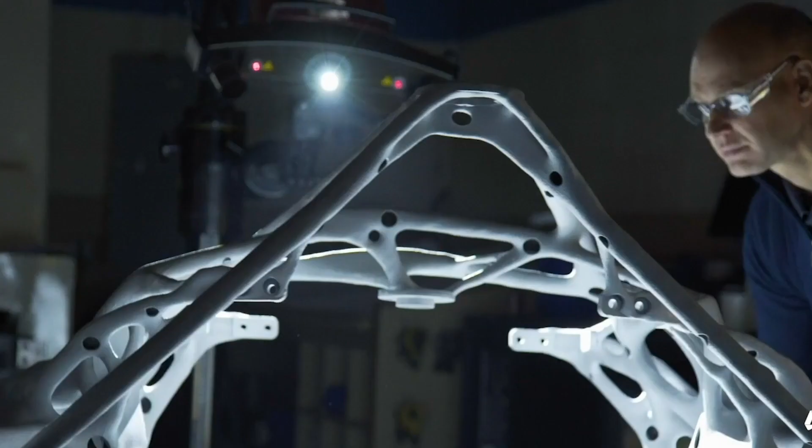I'm here at the Autodesk Technology Center in San Francisco, right at the pier, with our 3D printing lab right behind us. My name is Leanne Gluck, and I lead the business and industry strategy for additive manufacturing here at Autodesk, with a particular focus on our Fusion 360 platform.

2020 has been a landmark year, and we have seen the impact of the COVID crisis on the manufacturing industry, from interruptions to supply chains, to figuring out how workers can do their jobs remotely, to the needs for product innovation, especially in the medical industry.

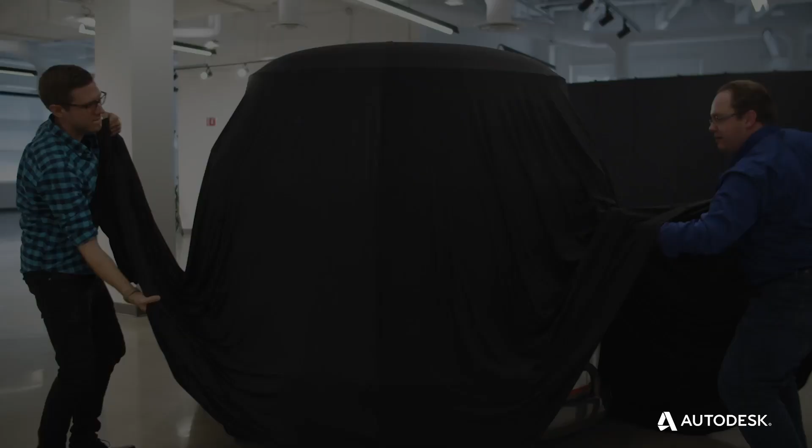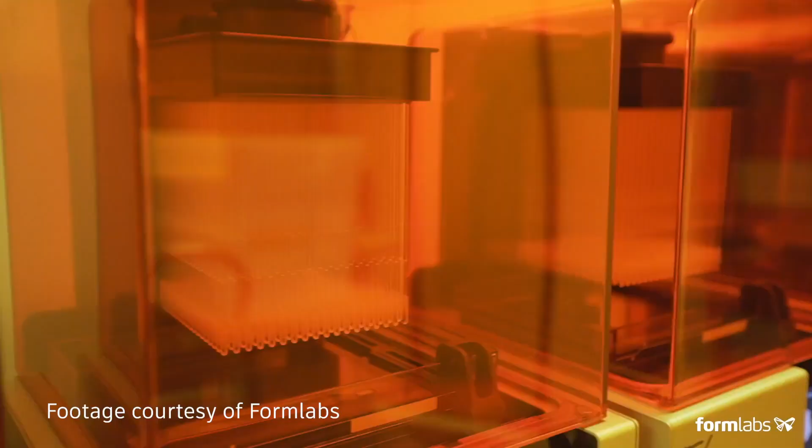And as we have seen, the additive industry has in so many ways risen to the challenge these current times have presented. From mobilizing to manufacture PPE, to redesigning and producing ventilators, to companies like Formlabs manufacturing 3D printed swabs, the COVID crisis has shown that 3D printing plays a key role in responding quickly to whatever comes.

We mobilized very quickly around PPE, but what really struck me when this all started was that this won't be the last emergency, and this won't be the last thing that we need to make quickly. We will have new issues that will compound. The next disruption may be a natural phenomenon, like another hurricane, a geopolitical issue, or another health crisis.

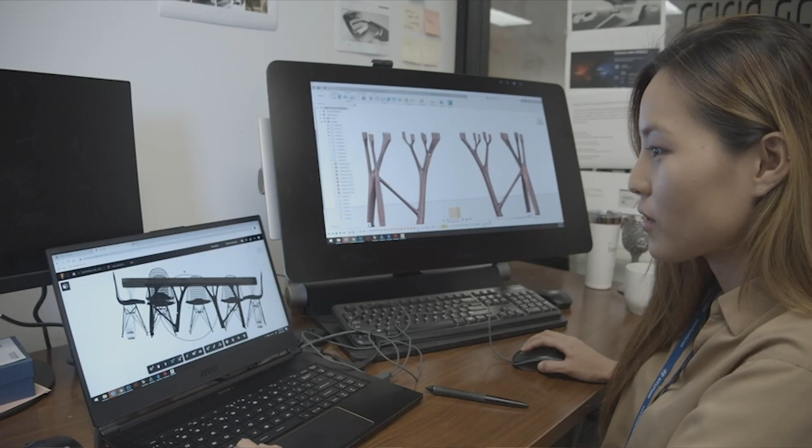And we've seen the need for growing collaborative platforms and cloud-based software that Autodesk provides to help us meet these challenges. Today, we are seeing the vision of additive manufacturing truly become a reality, helping us to diversify our supply chains, support new product innovation, retool our factories, and help shift us from reliance on that long global supply chain to more local, distributed, and on-demand manufacturing.

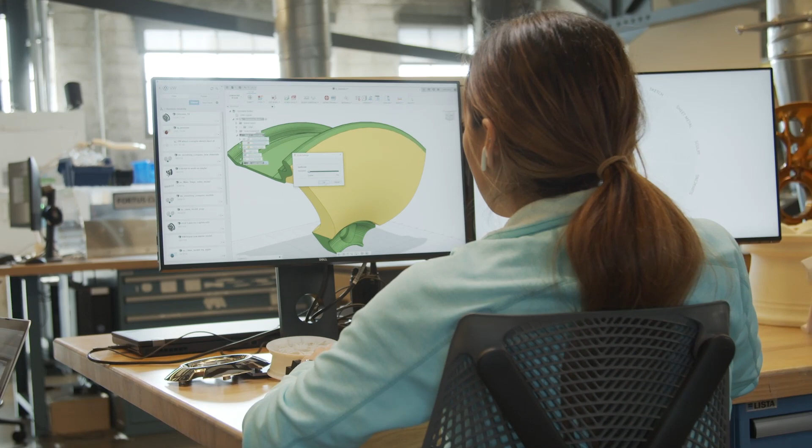And at Autodesk, we know that additive manufacturing software solutions play a key role in actualizing and expanding the vision for AM. What I see is that the 3D printing market and 3D printing in your industry and companies will be driven by applications. Applications are driven by design, and design is largely driven by people and by software.

Our vision for additive at Autodesk is to make 3D printing as smooth and accessible for your designers, your engineers, and your technicians as possible, streamlining design-to-print workflows, and bringing functionalities like latticing, simulation, and build preparation directly into the CAD environment. And within the context of Fusion 360, 3D printing becomes not just a standalone tool, but a key tool within a powerful toolbox.

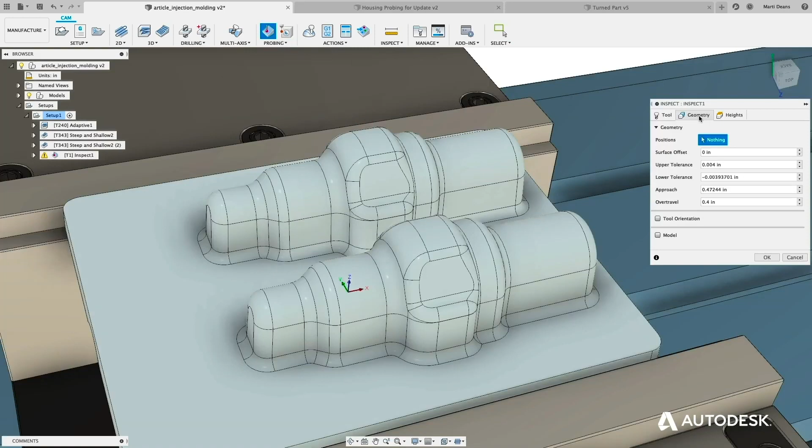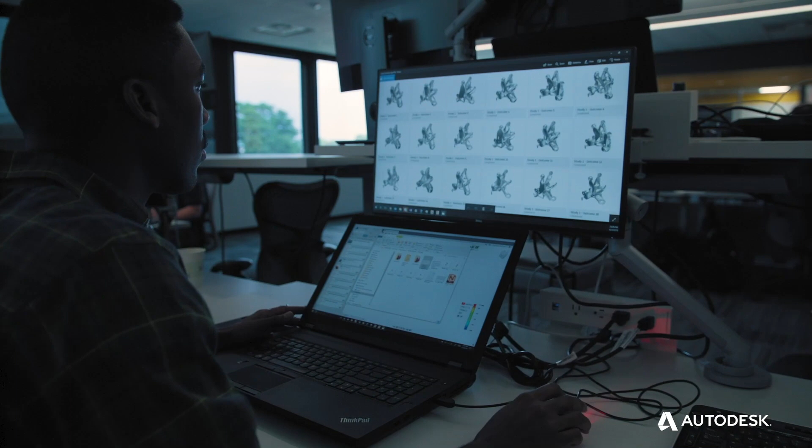A toolbox that provides subtractive tools for hybrid manufacturing and additive robotics, electronics functionality to support the growing trends in 3D printing for consumer electronics, as well as design exploration through generative design, and much more.

One of the questions we've been asking ourselves is, how do we help our customers and our engineers and designers make decisions early on around what design, with what machine, and with what material, at what cost, as early on in the process as possible?

And we are also asking questions like, what new kinds of products and innovations can we enable when our software allows us to do new things, like simulate for impact and energy absorption, modulate stiffness of material, distribute soft and hard materials to create things like interlocking joints, and design for heat transfer, adding voids to plastic to resist the transfer of heat, or designing to increase heat flow.

And we will continue to push the envelope to optimize and simplify design for additive with our software, moving additive design from this black box, black art that only a few people know how to do, to one where our software helps to automate and inform the process.

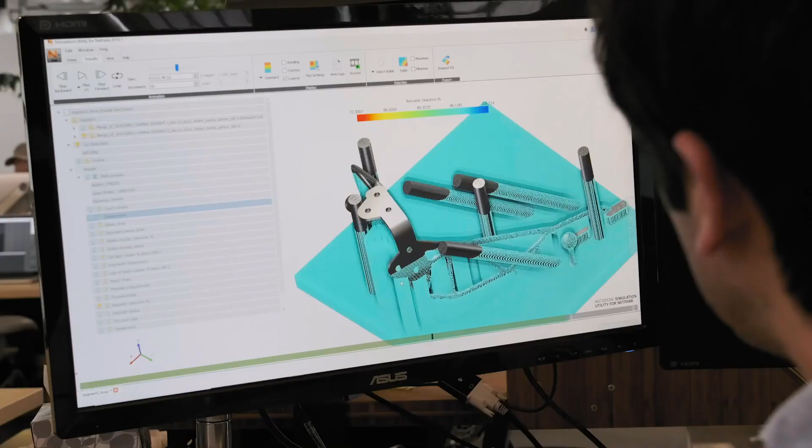As you've seen in your companies, the 3D printing market across the board is moving from early adopters to the early majority. And Autodesk is leading the way in what I like to say, opening the aperture and enabling additive manufacturing across all industries, helping our customers to cross that chasm.

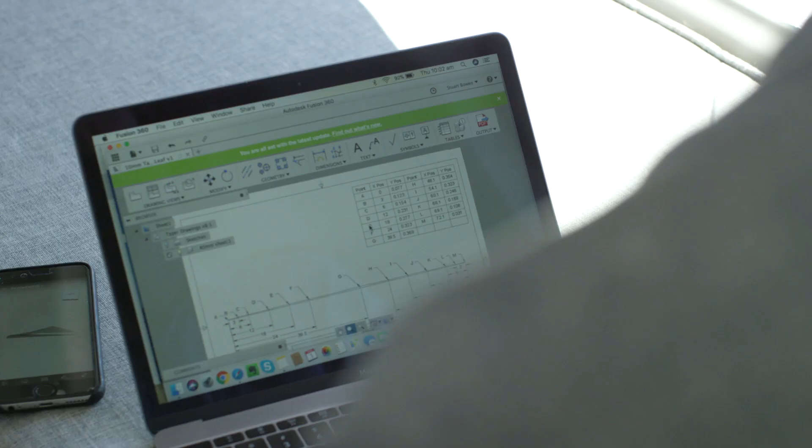And we're doing this with software products like Fusion 360, which is affordable and accessible enough to sit on every engineer and designer's desktop across companies, both large and small, allowing you to access the tools you need to innovate. We continue to push the needle with collaborations with software products and applications.

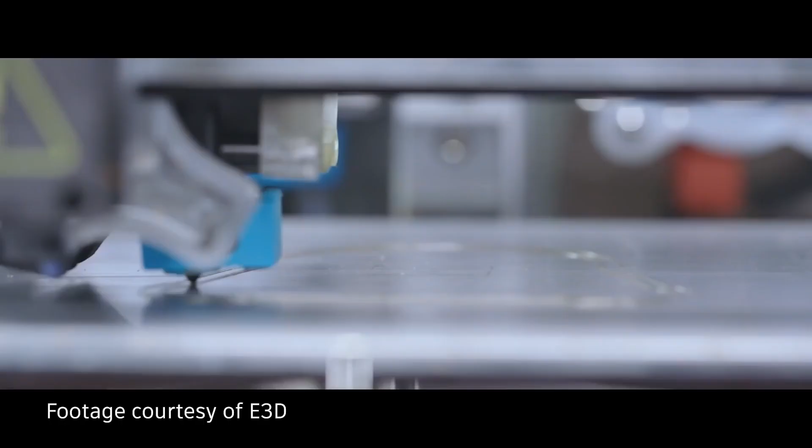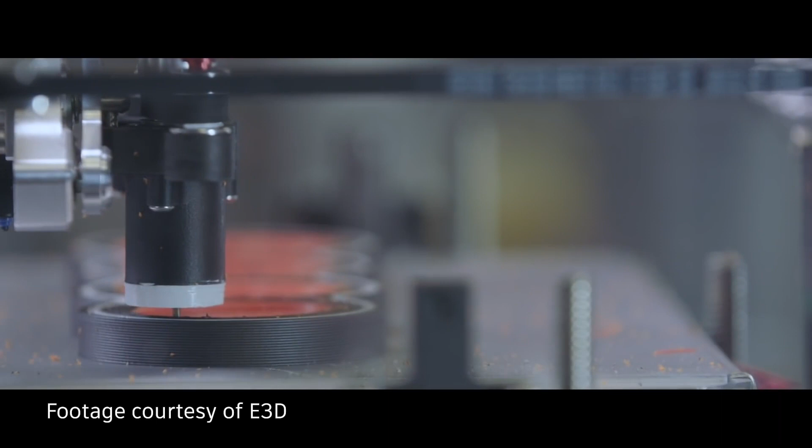And the community is seeing this. E3D, for example, has been working on pairing additive with subtractive. In fact, they just released a new subtractive tool that works with their tool changer system. The additive and subtractive tools are alternated throughout the print, so that milling of otherwise impossible to reach features is now possible.

Historically, combining additive and subtractive G-code files needed to be done manually. But E3D looked at what software could generate both additive and subtractive toolpaths and combine them automatically. They ended up choosing Fusion 360 for this task and recently released a plugin for the community to download and use.

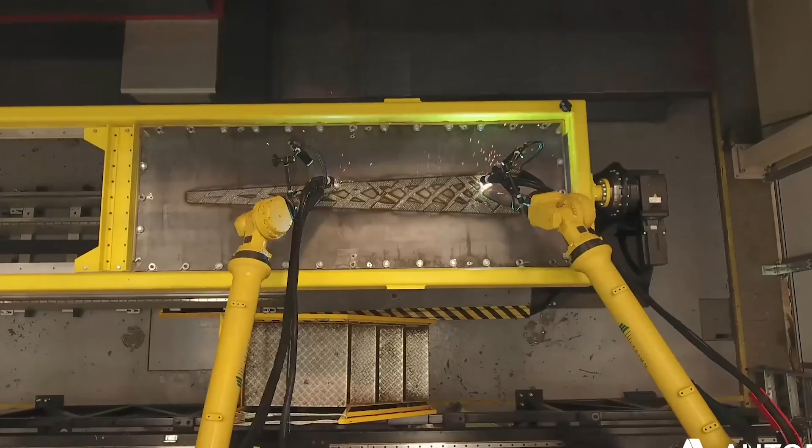Thinking about 3D printing in architecture and construction, during the summit we heard the LaSalle story about a modular machine concept for manufacturing large-scale components using a hybrid approach.

In our next software release, we are coming to market with the first concrete printer support in Netfabb.

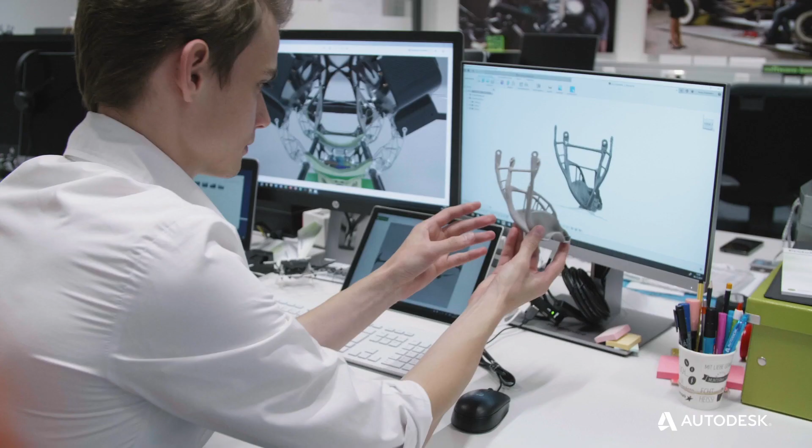We will continue to expand applications for green technologies for various industries, something I am personally passionate about, by leveraging new optimization workflows using tools like generative design and simulation. We are continuing to reduce the number of parts, reduce failure, reduce weight, and increase performance.

Now, I remember over 6 years ago when GE first talked about using 3D printing for component parts of the LEAP engine, and my thought then was the same as it is now: what is possible when we expand?

When we have not just one, but thousands of 3D printed parts in thousands of jet engines across thousands of airplanes in dozens of airlines, this means billions of dollars in savings, a step change in lowering emissions and energy efficiency across the board. And that is just one industry.

What will emerge as we reopen our country? And how will additive manufacturing continue to support? What new things will we need to make? New ways to open doors without touching them to get into our offices? New screening devices at airports? Where and how will we make them?

And what about the next shortage that will emerge, and how will that affect our supply chain, whether around materials or products? What future demands will we see for unavailable or costly products due to continued supply chain disruption? And how will we operate, redeploy assets, or retool our factory lines to grow capacity? What does it really take to change?

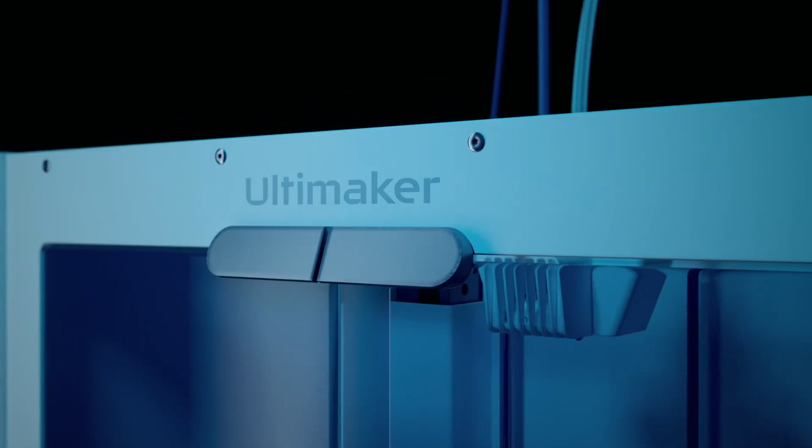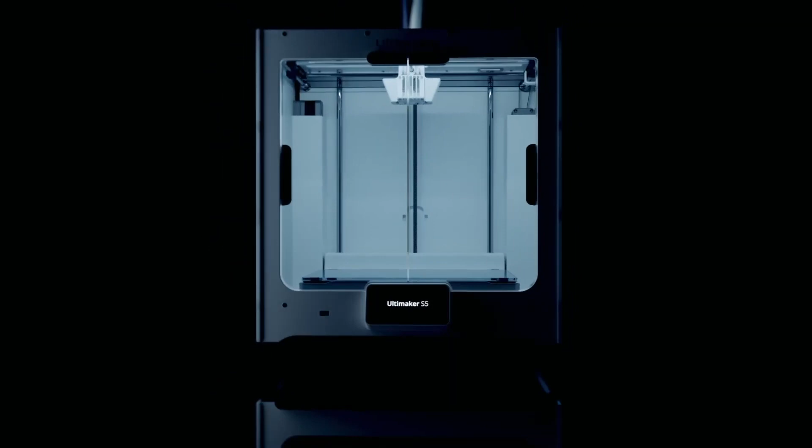Ultimaker is one of the leading manufacturers of 3D printers and software focused on plastic filament technology. Globally, they supply some of the world's largest manufacturers with systems for use from R&D to production floors.

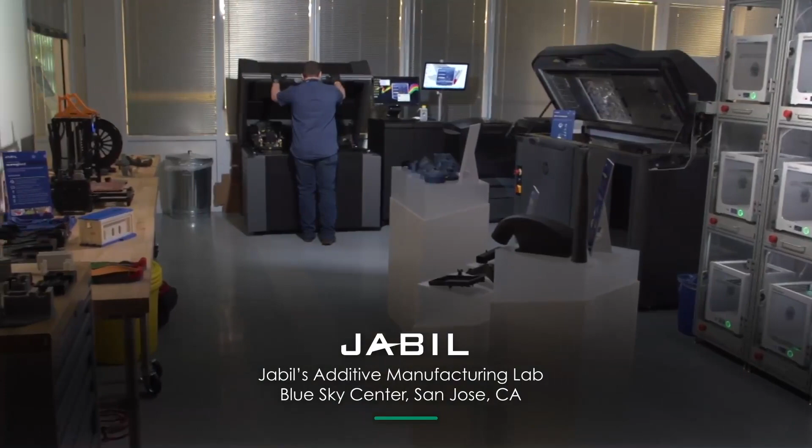Jabil is a $25 billion manufacturing solutions provider that provides design manufacturing, supply chain, and product management services, working with a broad range of industries and enabling innovation, growth, and success.

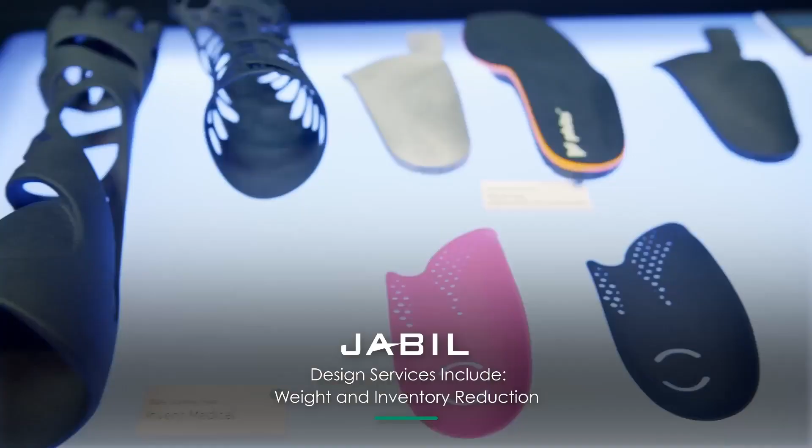The combined power of additive manufacturing software from Autodesk, 3D printing hardware, materials, and training from Ultimaker, and global manufacturing solutions from Jabil are truly helping our industry and our customers to rise to the challenge of manufacturing through change.

Thanks, Leanne. And I would like to thank the entire crew at Autodesk for the invite to talk about change in manufacturing. I'm here today in the Autodesk Technology Center in Boston, and I have to say, it's pretty amazing.

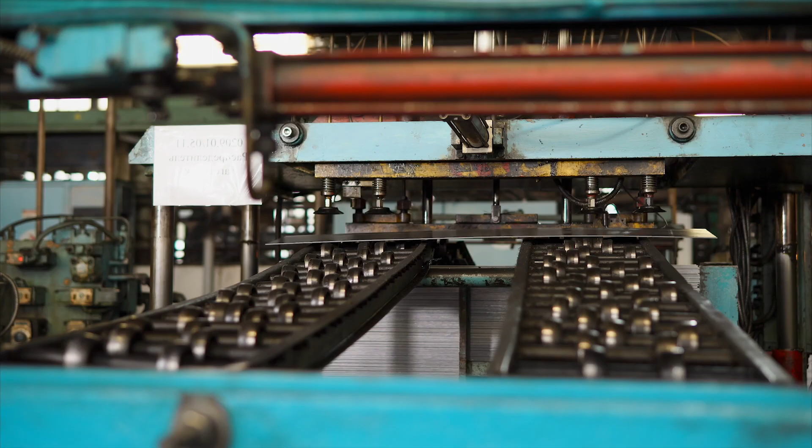You know, I don't believe Autodesk could have chosen a more apt theme for this year's conference. With the hits a lot of companies have taken to their supply chain this year, most are getting a crash course in adapting to rapid changes in their manufacturing environments.

Ultimaker works with manufacturers large and small that are spread vastly across the spectrum of size, innovation, and global reach. So we see a lot of the challenges that they're dealing with on a daily basis. Going forward, the need to shift back from global to regional production will be more and more important.

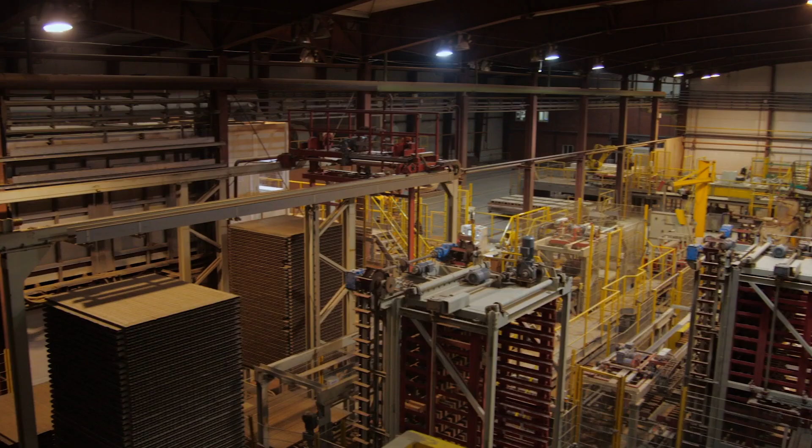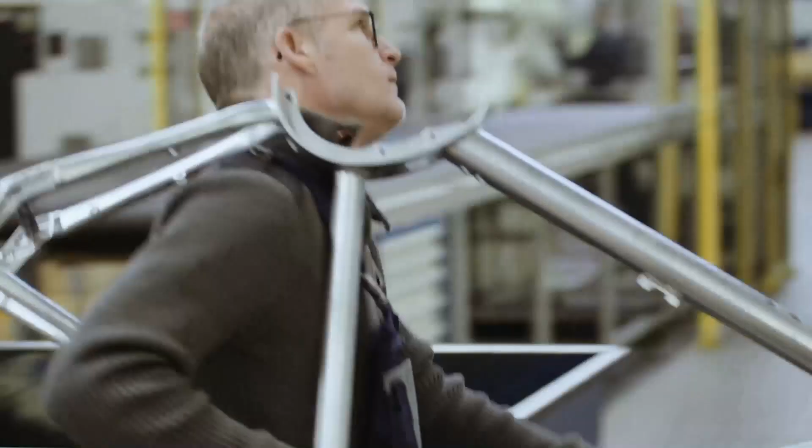3D Hubs put out a great report on supply chain resiliency. If you haven't read it, you should, it's really worth the read. They found that 72% of companies have experienced supply chain disruptions over the last 10 years. 72%, that's a big number. Now, I'm sure not all of those have been on the scale that we've seen in 2020, but they found that 59% of companies believe geographically distributing their supply chain is the best way to avoid disruptions in the future.

Ultimaker and the additive world en masse have been talking about moving to a digital warehouse for some time now. We've started to see the realization of this, starting to see the printer become the new form of the UPS truck. But localized production is not a small challenge.

There are a lot of skill sets that need to be learned. We've deployed Ultimaker's accelerator program with a decent number of large manufacturers now, and we see that there's a skills gap at the local manufacturing level. The vast majority of manufacturing sites aren't ready to adopt 3D printing.

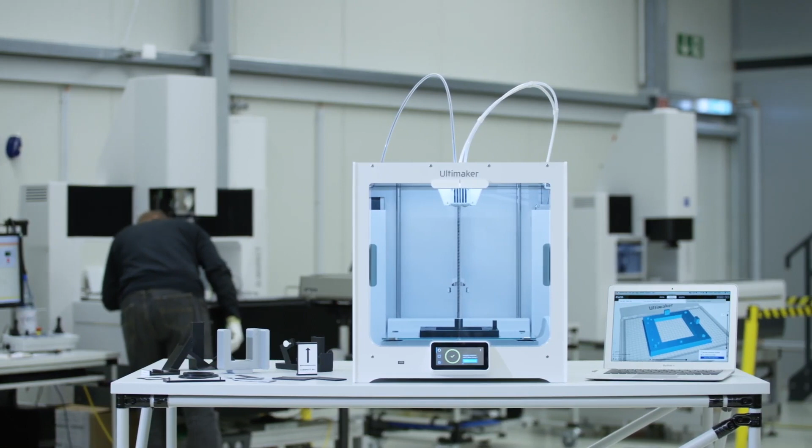We've taken the approach that the best way to prepare them is through manufacturing aids. This allows them to get used to the technology in a low-risk environment that still provides the company gains in terms of cost reductions, lead time reductions, and increased uptime of manufacturing equipment.

But in order to really democratize production in region, manufacturers need to start looking internally at their resources and at the available technology to start to develop a transformation roadmap that helps make the changes stick. The increasing demands of customers and consumers aren't going anywhere in the near future. So companies have to make sure that the changes they're looking at making are not only quantifiable, but transferable region to region and plant to plant.

As buyers expect assurance of supply and lowest landed costs, Rush, how are Jabil and its customers tackling regionalization?

Thank you, Brian and Leanne. We really appreciate that given this time of discontinuity, Autodesk is investing to bring our manufacturing community together to compare notes on how the business is changing. And boy, is it changing.

There are a lot of dynamics taking place in the manufacturing community, and the conversation with our customers around supply chain resiliency certainly grew on the heels of not only the COVID-19 pandemic that's been ravaging our supply chain since back in February, but also with the trade and tariff escalations more than a year ago now. That said, COVID has severely impacted over 51,000 company supply chains since February. To level set with the audience, according to the World Trade Organization, over 60% of consumer products and over 40% of technology, media, and telecom are sourced from China.

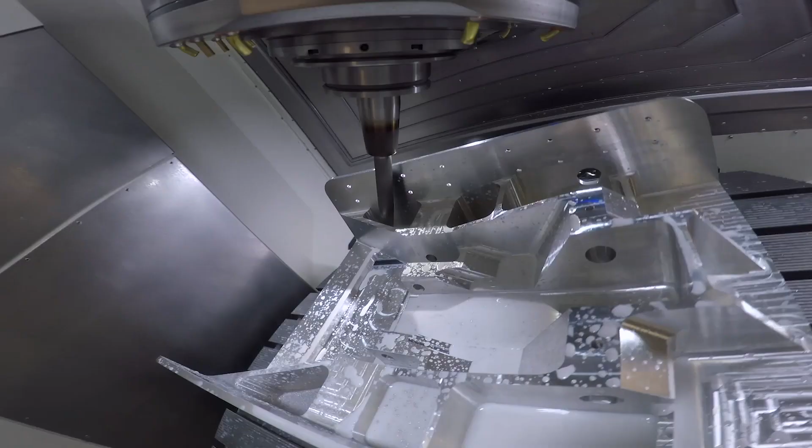The reason this is important is that while digital technologies are increasingly making it possible to reshore certain portions of the supply chain, the manufacturing of many components will remain connected to low-cost labor pools for years to come. This makes the integration of design, engineering, and production critical, as product realization will continue to require collaboration across remote teams, increasingly using platforms such as Autodesk's Fusion 360.

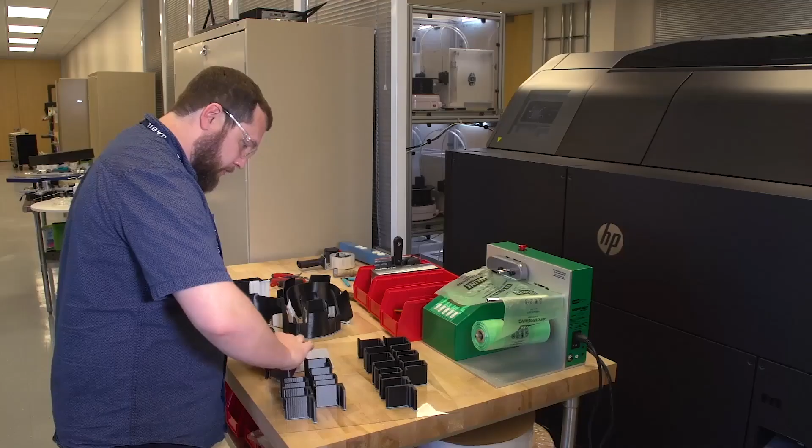To truly harness the flexibility of digital in combination with robust design tools, our teams have focused on standardization of additive processes and others to harmonize and streamline design to delivery. This includes applying design rules associated with specific materials and additive processes so that we can quickly get parts into printers across our network with confidence that we'll achieve repeatability from batch to batch, printer to printer, site to site, and region to region.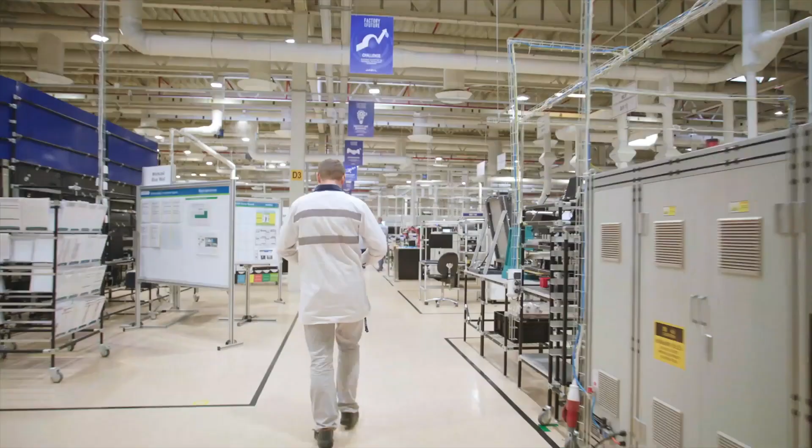Quality systems are also a critical area of focus for our factories as additive platforms increasingly make their way into our production floors. These processes, with all the variability that enables their flexibility, whether used in regulatory industries or for general industry applications, must be agile, while ensuring the product meets customer requirements as well as those associated with various industry standards, including ISO 9001.

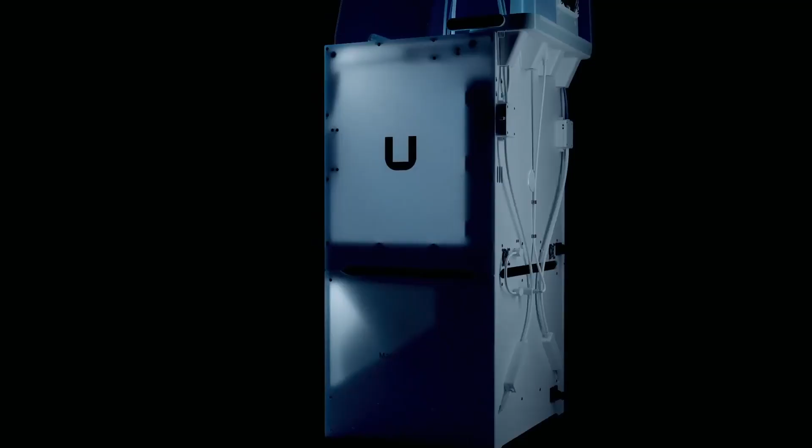While companies such as Ultimaker are making the 3D printing process ready for a host of applications, it is important to look upstream and downstream in the manufacturing process to match steps throughout production. This is critical because while additive is capable of the speed of digital, its benefits may be lost if processes either upstream or downstream inhibit that speed and agility.

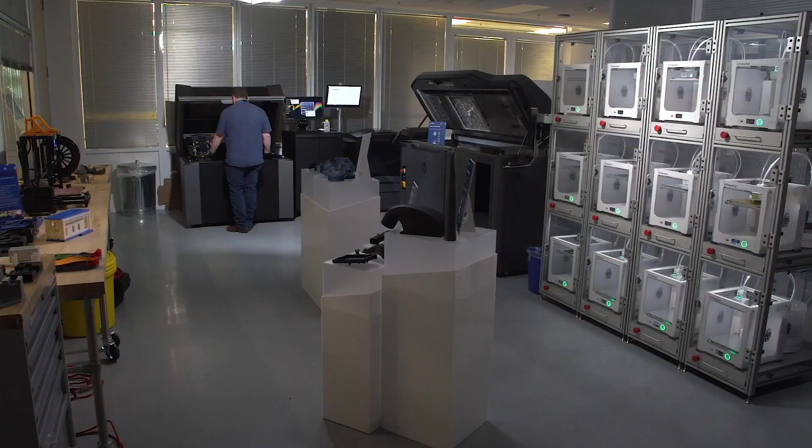In addition to reviewing the overall production process to realize many of these benefits of digital, it's important to also consider the full product lifecycle. Additive manufacturing has certainly proven its value in areas where customization is key. We think about dental aligners, custom insoles, and we're beginning to think about implants, where the effectiveness and efficacy of a customized product tailored to your unique body has tremendous value.

And we shouldn't forget that in the in-ear hearing aid market, there was heavy disruption over a short period of 2 years where additive converting technology completely usurped the use of conventional manufacturing technologies. However, the majority of products Jabil produces for its customers will be delivered through CNC and injection molding machines at the apex of their production life cycles and volumes.

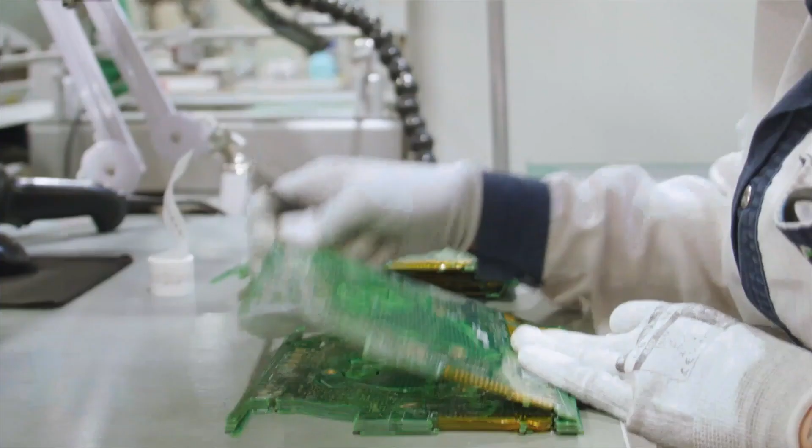Even in these cases, when the design, process, and materials are managed appropriately, the life cycle can flow seamlessly with reduced risk and cost between digital and traditional technologies. As the vast majority of manufacturing continues to be high volume for Jabil and its peer group, we see additive predominantly applied in the very earliest phases of the production life cycle.

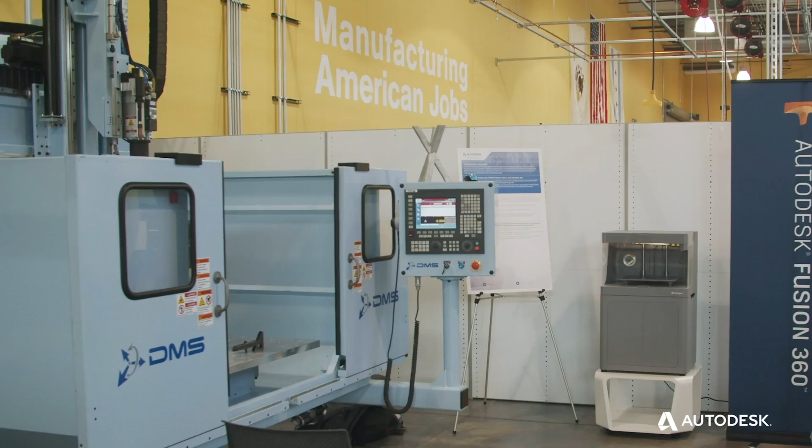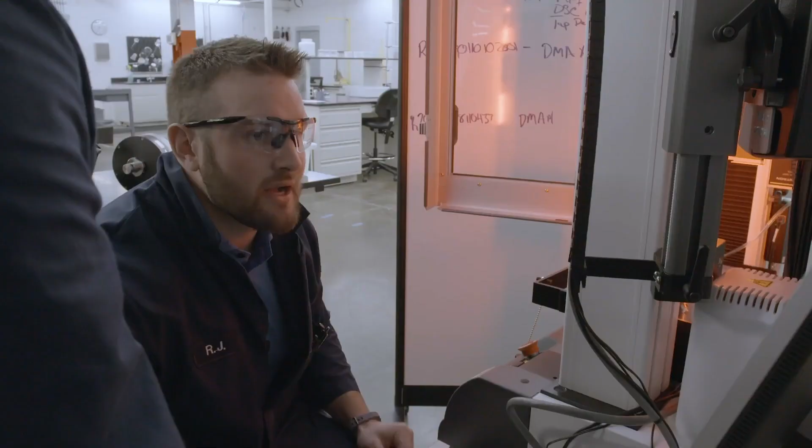To put context around this, an ARC research report states that the market for end-use parts is estimated to be $490 billion, with an AM penetration rate of only 1%. While in the prototype and bridge space, in 2019, the market represented $12.5 billion with a 40 to 50% penetration rate. As the cost of additive manufacturing materials and platforms continue to decline and their speeds and throughputs increase, leading companies continue to invest into additive as the technology makes its way further into the product lifecycle.

Lastly, as we think about moving production within our factory network, one of the largest costs that is commonly overlooked across the industry is tooling and fixturing to make a production process ready for manufacturing. A study was recently conducted by ARC Research that suggests that the market for tooling and fixturing is $30 billion, and that additive has now penetrated over 5%.

5% may not seem like a large number, but within our factories, where we've used platforms such as those provided by Ultimaker, we've documented savings of over 30% when compared to outsourcing conventional solutions. But more importantly, reduced time to production, which helps us better utilize our assets in getting products to market no matter where we find ourselves in the product lifecycle.

Brian, what is Ultimaker seeing in terms of other customers as they transition through various lifecycle phases and volumes?

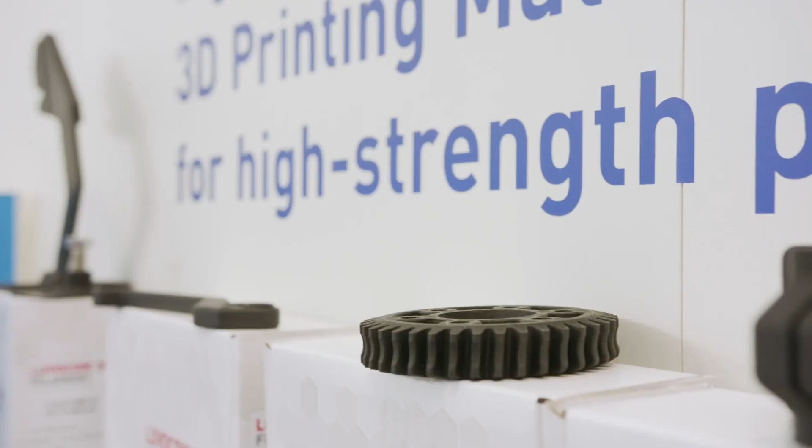We definitely see the shortening lives of today's production lines. A few years ago, a production line may have been operating at maximum capacity for 7+ years without major changes. But that's starting to wane a bit. We're starting to see the impact of faster product innovations and shorter product life cycles in the form of more frequent retooling due to these design changes.

Certainly, engineers have done a good job keeping as much of the production line relevant as possible. But each product iteration requires new tools, new jigs, fixtures, and sometimes an entirely new production line. With this retooling, some are of course looking at cost reductions, which they can achieve through using in-house printers, but they're also looking at reducing the time needed to get a new line up and running, or to switch over from one product to another more effectively with less downtime.

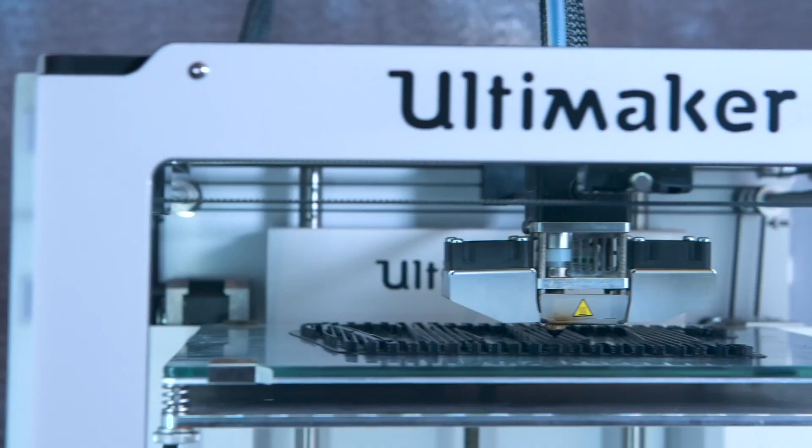As the volume starts to fall off, they're also looking at low volume production. There are a few early innovators that are starting to look at their end-of-life volumes through the lens of additive, but we haven't seen this in any meaningful scale yet.

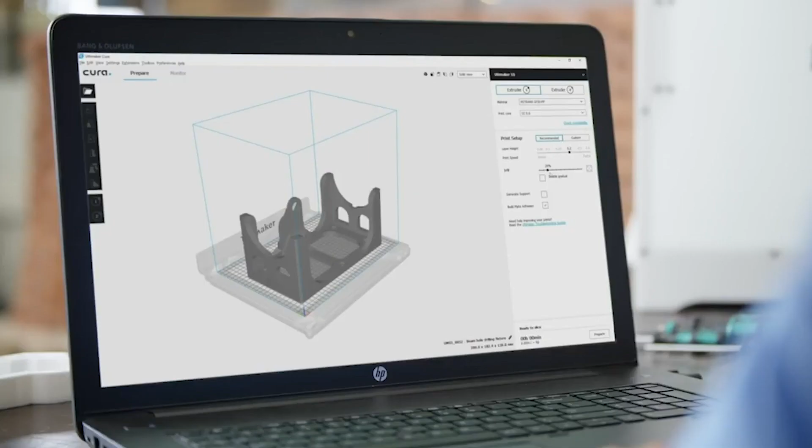Some of our customers are starting to think more strategically towards the future though, and are starting to train their R&D teams on how to future-proof products for eventual additive production. As the demands on product lifecycle management increase, shortening life cycles reduce the available time to amortize costs associated with tooling lines.

Rush, as one of the world's top contract manufacturers, how is Jabil dealing with the shortening of product life cycles and the need to rapidly adjust to changing product innovations?

As Jabil and its customers have responded to changes in the market, including tariffs, pandemics, and other global conditions, additive has certainly earned its place as a powerful weapon in bridging from design to delivery. However, we believe this is not relegated to market shocks like we've recently seen. We are experiencing a trickle-down effect from consumer empowerment at the hand of digital brokers such as Amazon.

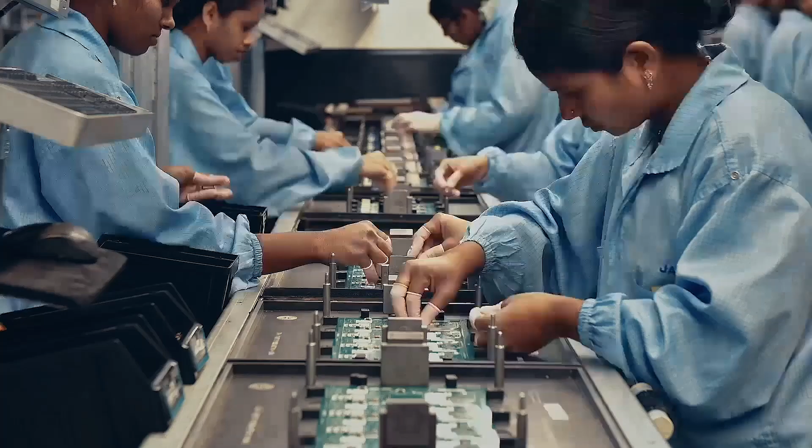It's driving much shorter product life cycles, smaller batch sizes, and demands for faster market response, which challenges conventional manufacturing, typified by investing in expensive tooling and having to run thousands, if not millions, of products to justify the initial investment. To satisfy the need for speed, we are increasingly using additive to enable faster iteration of tool design as compared to traditional methods of outsourcing and soft tooling.

We've had tool shop managers across our factory network document cases where a conventional production tooling cycle has taken up to 4 to 6 weeks, from initial design through validation to delivery to our lines. When they've used alternative methods such as an Ultimaker print farm on site, the cycle time was cut to 1 week. That represents a 3 to 5 week savings, which can represent millions of dollars of increased product sales as customers head into a holiday buying season.

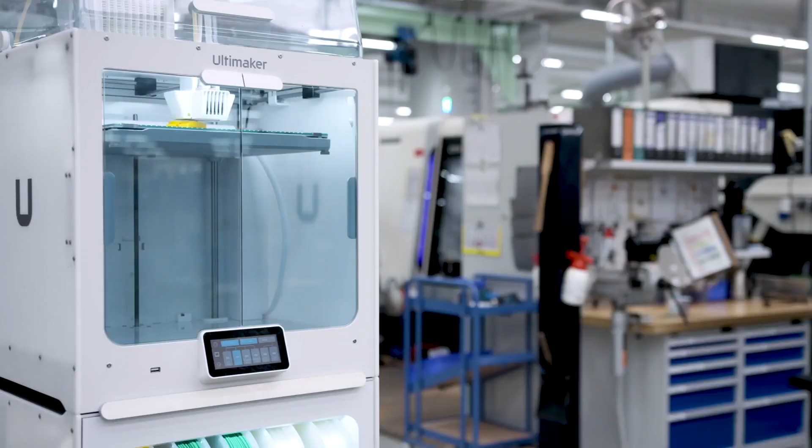In a similar fashion, we're accelerating the validation of products and obtaining certifications and approvals through the use of our additive processes. While we're likely all tired of hearing about COVID and the run on personal protective equipment, this is precisely where additive delivers great value to our healthcare community through leveraging idle printers to qualify and supply additive PPE for first responders. This acceleration is not expected to end with the pandemic response, as more economical, small batch production will be enabled for focus groups and regional market testing.

Again, we are already seeing our customers' product design teams better align their product development and new product introduction to the demands of an increasingly empowered base of consumers through the use of digital technology.

Out of the groundswell of additive response to the pandemic, it also appears that the industry is embracing the power of democratization, not only for design, but in distributing production across a network of digital assets.

We are exceptionally proud that Jabil was able to leverage its digital investment in being one of a large number of entities to respond to the COVID crisis, as one of our contributions included delivery of a critical respirator component to acute care hospitals.

Within 2 weeks of initial contact from one of our long-standing healthcare customers, Jabil began shipping tens of thousands of components with the requisite level of quality and documentation to acute care hospitals. While I believe getting through the qualification process itself was impressive, what was also truly remarkable was the orchestration of production on printers beyond Jabil's factory network, leveraging other suppliers and ecosystem partners.

What we see coming out of the shifting consumer and manufacturing landscape is more collaboration across the production ecosystem. Key to enabling this collaboration will be expanding levels of design rules and standards around additive manufacturing processes. As we think about the standardization that permits stable production, Ultimaker has been a great partner for Jabil in realizing more rapid deployment and redeployment of our manufacturing through tooling shops and on the production floor. Brian, maybe you can share more about your efforts to drive flexibility into the manufacturing environment.

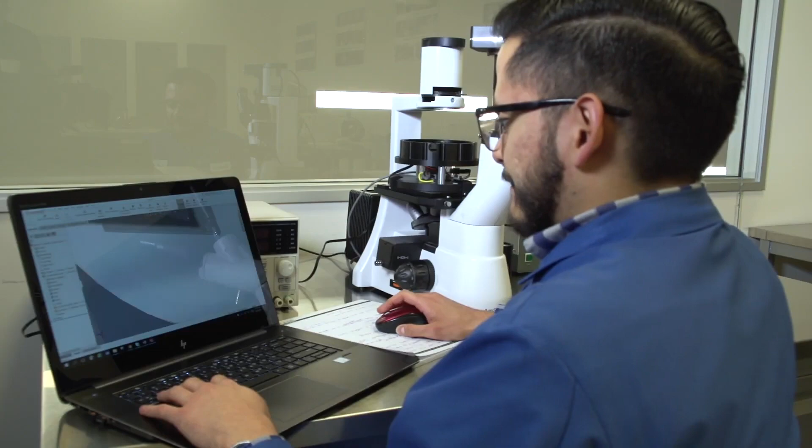We have some customers lately who have an eye on maintaining flexibility while ensuring that their own high quality standards are met. They've put in a material evaluation and qualification process to allow their engineers access to a suite of materials that they know meets their internal material performance criteria, but also allows their engineers the flexibility to choose from materials based on the requirements of a particular application.

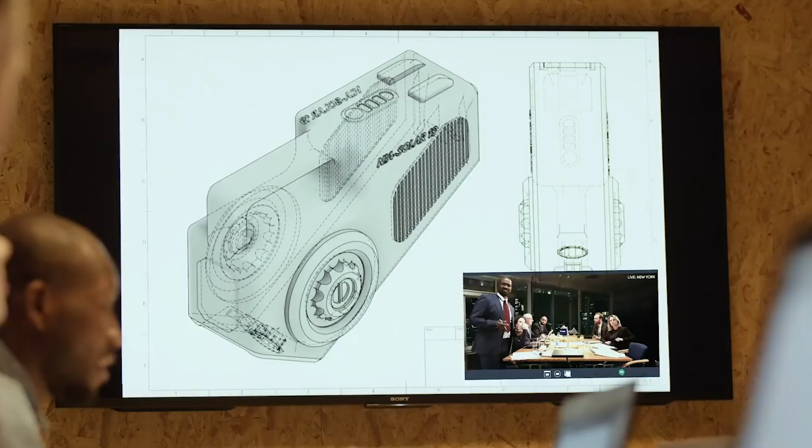But those same engineers have more than just material needs. As product innovation happens more rapidly and life cycles get shorter, the manufacturing floor shifts towards a more complex, changing landscape. If you can quickly redeploy your print assets right where you need them, when you need them, you allow the engineers the most flexibility and the best working conditions to get the job done right, done quickly, and done in the most cost-effective manner possible.

This is exactly where some of Ultimaker's customers are headed. During the shutdowns this year, we saw a lot of customers actually buying their engineers printers for their homes. Since most engineers are working remotely, or at least working a percentage of their time remotely, with the printer at their home, they're still able to design parts and test iterations, or even print parts for their next trip to the office. The more connected users are actually keeping the printers at the office and managing those printers remotely through Ultimaker's digital factory. We too have had to adapt to a lot of changes recently though.

2018 and 2019 showed the vulnerability of supply chains to the effects of politics and tariffs. And 2020 pushed that to the limit with an entire global collapse of the supply chain, as nearly every non-essential manufacturer shut its doors for at least some period of time. Unfortunately, the world's shutdown wasn't a coordinated effort, so various suppliers had staggered startups and staggered product availability.

Because of this, a number of our customers are starting to look at their MRO cabinet as a source of both risk and opportunity. And they're looking to implement an additive strategy to address the lead times, costs, and risks on an uncertain and potentially volatile supply in their MRO parts.

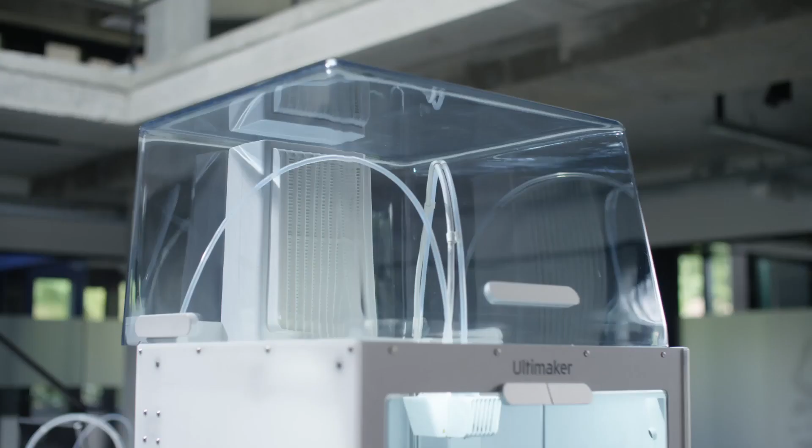This time, we had a new technology to help though. The additive industry has been preaching about the benefits of 3D printing for years, but in 2020, the world finally heard the call. Additive is not a panacea, but deployed correctly, 3D printing is a tool that can no longer be ignored.

The next 5 years will continue to pressure the world's manufacturers to regionalize their production. Additive's role in that mission will only continue to grow.

The Autodesk Suite and Fusion 360 will continue to drive part creation, transformation, and the creation of part libraries around the world. And as it does, we will start to realize more of the digital library, and we will truly start to accelerate the world's transition to local, digital, distributed manufacturing.